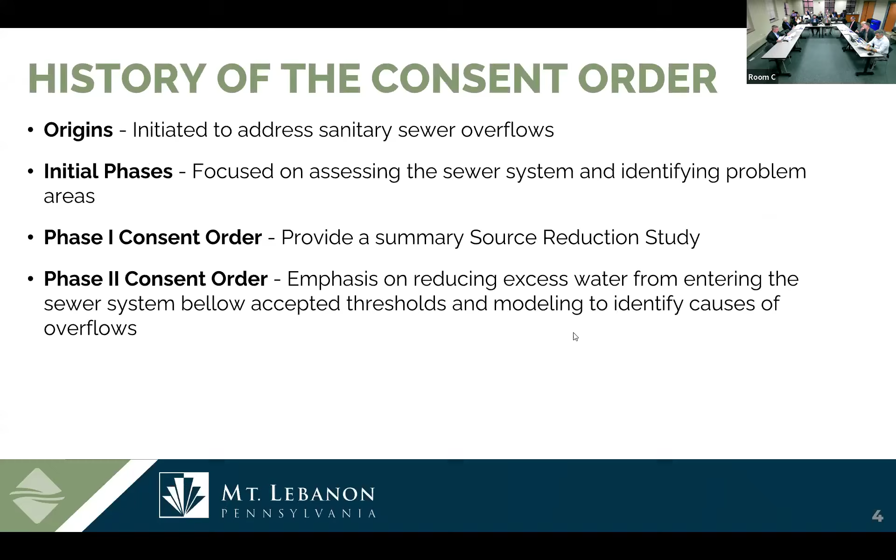So with the background, we're in the phase 2 order. We've been through a number of steps through the initial phases and feasibility study in phase 1. Within that phase 2 order, progressing through there, we're under construction right now. That was last year we talked about the large construction projects. Mount Lebanon really got out in front, doing some larger construction projects over the years prior to this year. That's all wrapping up now, and we're getting ready to move into the performance assessment, which is due by June 2026. So that's where we'll get into the meter discussion and monitoring in order to better understand how these projects actually fared.

By the end of next year, we'll complete a final report that'll be submitted to the county health department. Ultimately, there's a regional report that will include all the individual reports, as well as an overall summary, essentially setting up the next step for the phase 3 order that'll come after that.

Do you have a sense of when that is, or when that would be? So currently, the order we're under right now is signed with a completion date of 2029. It's expected this order will run until 2029. Then that's just a period of giving time, about 2 years worth of time in between when that final report is completed and working with DEP on what that next consent order is going to look like.

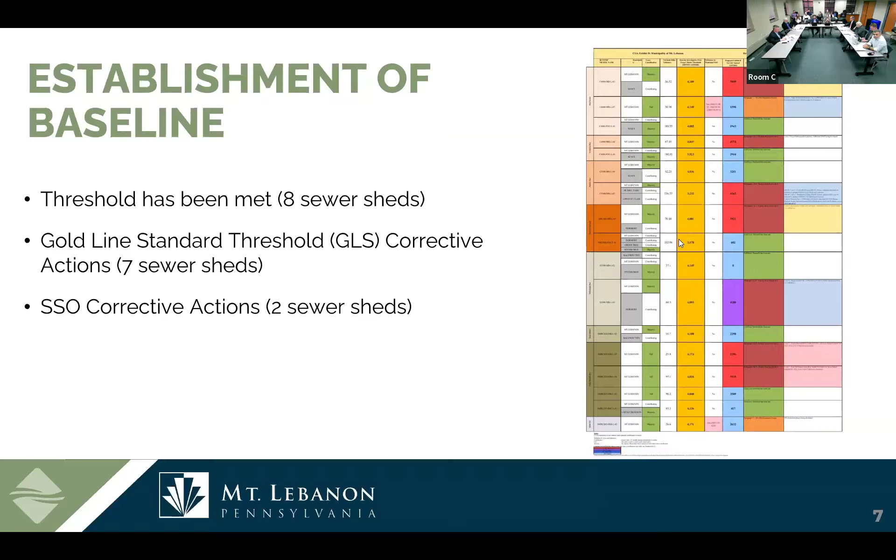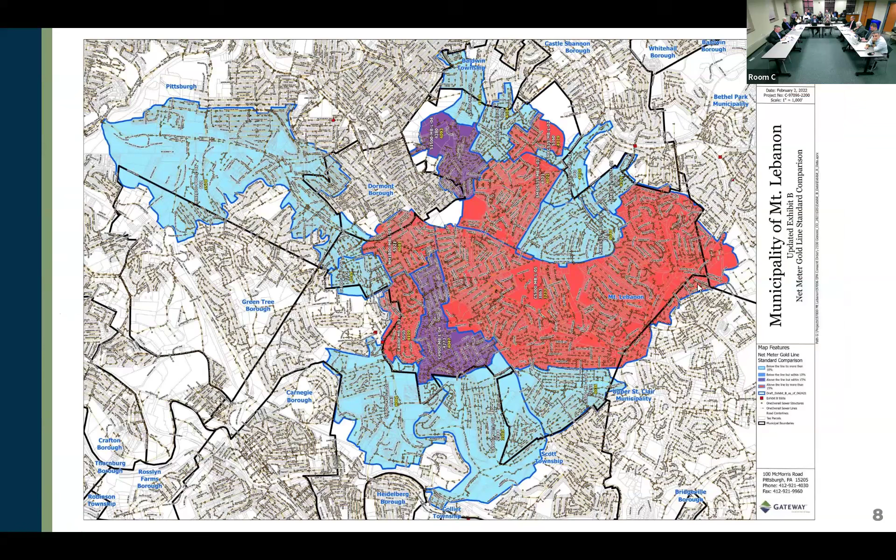Just an overview, looking at the overall municipality, you've got to kind of orient yourself - the north arrow's to the left on this. But it looks a lot worse with the big blotch of red. That is primarily Painter's Run, one of our bigger sewer sheds, which was over the Gold Line standard. It's where we focus the majority of our work - a lot of work's going on in that sewer shed currently.

So with that, there's approximately almost 100,000 lineal feet of CIPP, or cured in place pipe lining, that has been proposed as part of the work over the years. The required removal per the consent order is about 360 million gallons per year. Currently anticipated to remove 450, that's theoretically based on the calculations used to evaluate.

That's taking into account not just these larger projects that we're proposing, but also just the lining work that we're doing on a regular basis too. So it's the O&M work, operation and maintenance work done on a regular basis, as well as the larger GROW projects, which we've got a lot of grant funding for.

Even considering that Mount Lebanon is kind of top of the watershed, we've done more than our fair share of work there. Yeah, and it's an older system, a very dense system, so there's a lot of work to be done. But I think the last metrics were over 40% of the entire system has been lined, which, working with Rudy, that's one of the main goals - we want to rehabilitate all of it. It's 70 to 100 years old in a lot of cases.

And the consent order is just accelerating that. Exactly. We've even kind of changed the direction - the operation and maintenance, we're looking for specific defects maybe that we're repairing. Now it's a little bit more proactive in terms of where we're seeing I&I, or inflow into the system, and lining a lot of those lines.

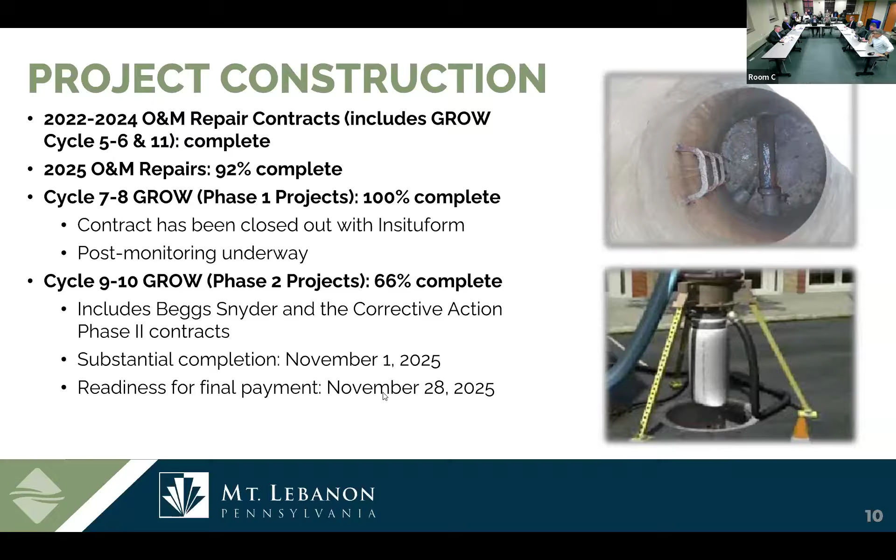We actually had some post monitoring completed. We have that data, we're starting to process some of it, so we'll have preliminary results of those projects. Then the cycle 9 and 10 GROW grants, that was Beggs Snyder and the overall larger corrective action projects - that's what was being performed this year, again with substantial completion anticipated in November and ready for final payment by end of November. We're still trending towards that as well.

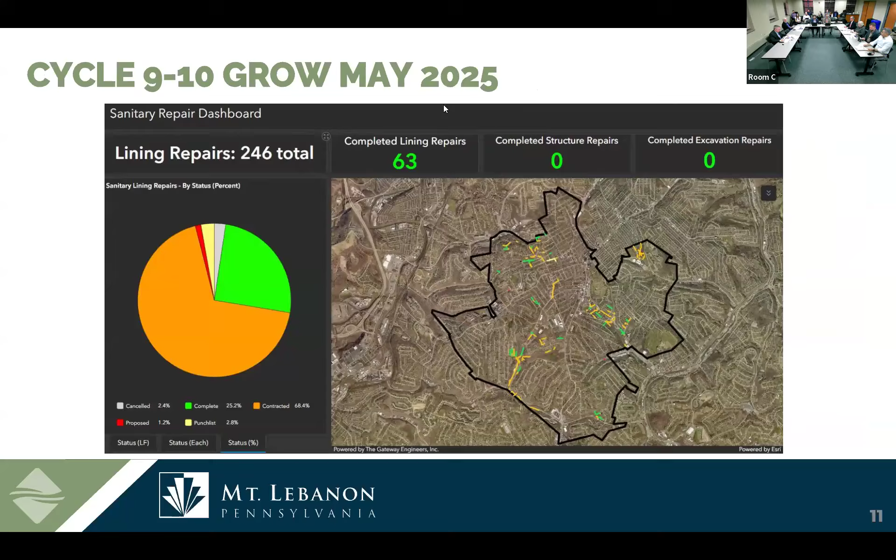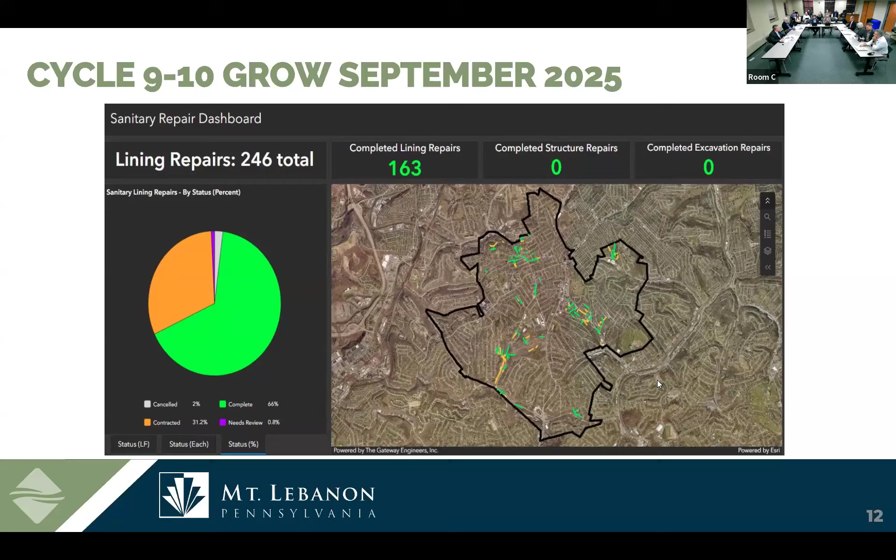This is just showing very quickly that initially back in May when we talked, we showed 63 of the liners were completed. Since then, 163 liners were completed, and that's just based on what we have in the database. I know the contractor was out there working today, I was talking to a resident on it today, and they even have a couple of crews out there, so they're working pretty quickly through it.

This was something Dan really wanted to show, a little bit of a metric showing what we're trying to achieve here. Ultimately, the required removal is about 361 million gallons. We are expected to remove about 451 million gallons if everything goes according to what was theoretical. As of right now, based on work actually completed, we're anticipating that we've already removed about 347 million gallons - again, just based on theoretically what should have been removed from those pipes being repaired. So we're already near our goal. The actual amount will be determined based on the metering performed, and the meters will continue to collect data into 2026.

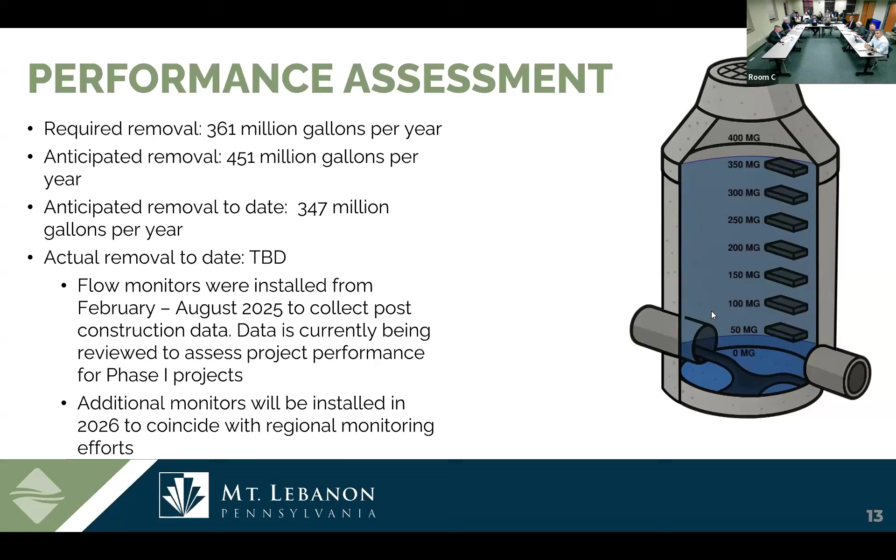Is that just like a random drawing, or - I mean, we made it, but I just thought it would be a good graphic, like what are we trying to get to, the top of the manhole? Yeah, essentially, just like the thermometer showing it filling. We did it - fundraising, fill the can.

So this is the spending portion we talked about. For 2026, this would be expected to be on the commission meeting agenda for October 28th, not tonight, two weeks from now.

For the metering, in order to do post-monitoring evaluation of all the sites and complete our reporting for the consent order, it was a total of about 14 locations. ALCOSAN has already taken care of 2 of those, and other municipalities, primarily downstream, are taking care of about 3 other meter locations. That leaves 9 meter locations.

For budgeting purposes, we're using a worst case scenario of 9 meter locations over 6 months worth of data. That's anticipated to cost about $1,500 to $2,000 a month. We're working with the 2 main metering contractors in town to see if we can get a bulk rate across all the metering we're doing. With that, it's anticipated to cost about $81,000 to $108,000.

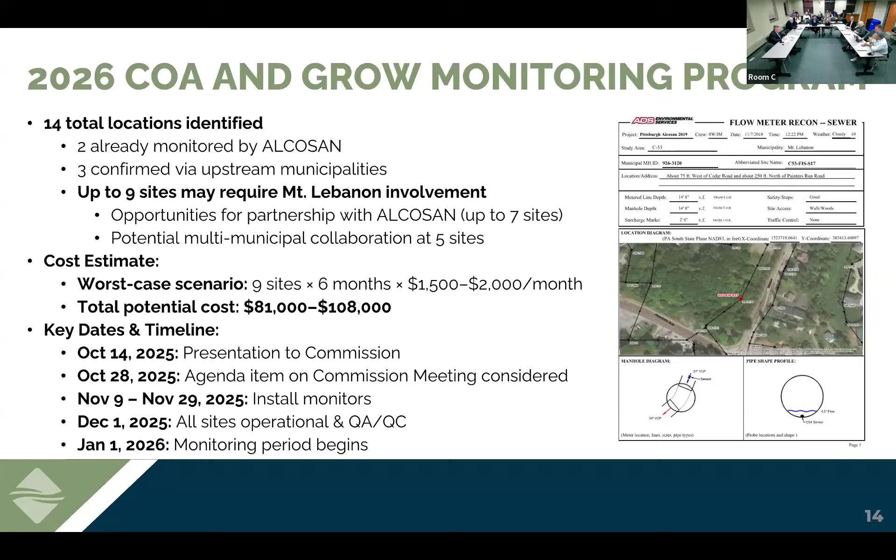Before we vote on this, can you give us a total amount we've received in Grow Grant monies? We can, and I think I have a quick slide on that — we'll give a quick overview.

And are these new meter locations, ones we haven't metered before? No, primarily they're all areas we've metered before, pre-metering before the work was done. So then it'll really be a comparison after the fact to show how much was actually removed by that work. Okay.

And the art is trying to determine, through all sorts of analyses, what the situation was at the time of the pre-metering, and compare that to the post-metering. Because rainfall changes — a lot of factors could make it look like it went up, but it might just be a rainier year in 2026.

It's helpful, because we had resident pushback on a lateral ordinance since we had really no data, although scientifically we know I&I is an issue. We didn't have data to prove that one way or another. Hopefully this gives us more of what we need, so if in the future we need to go down the route of a lateral ordinance, we have a lot more data to prove why it's necessary.

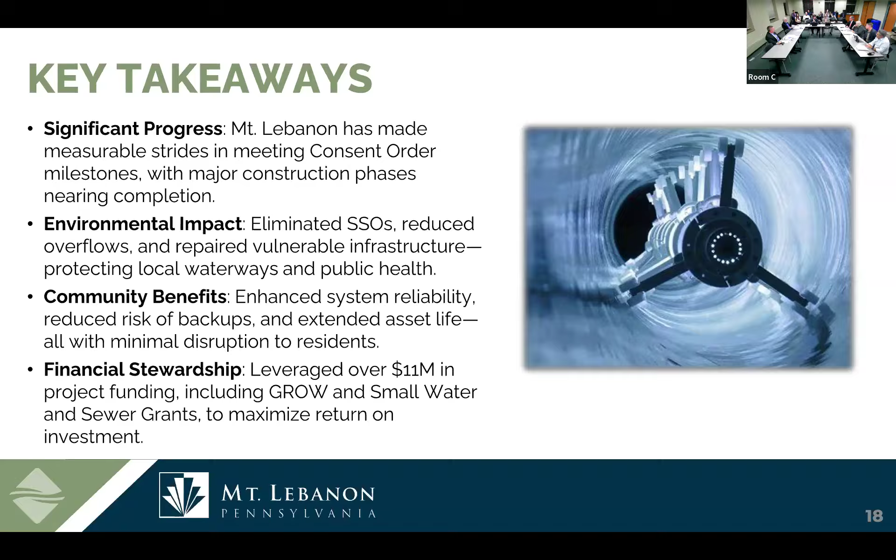We did a lot of work then when we had like 200-year storms within the span of a couple months. You're never necessarily going to design to that, but you've got to look for what those events show, and any of this work is helping with that. We had quite a few residents who had hundreds of thousands of dollars worth of damage to their homes because of overflows.

I just want to point out this is GROW Cycle 11. We had applied for this back in May or June. Just heard last week - I think Keith got the agreement last week or the week before. One thing that was a little bit different than most was we had actually received grant funding for this previously. It was the Cedar and Eisenhower repairs that we had received grant funding for back under GROW Cycle 6, for a grant amount of $87,000 for a total project cost of $490,000.

Because that was intertwined with some other work that had been done, we said why don't we apply for reimbursement on this. We did metering work, and that metering showed we had a high amount of removal. So instead of only a 17 to 18% match, the total project was closer to $1 million, like $950,000, and they awarded 60% of that instead of 17 to 18%. So that's $580,000 that we got for that grant, and that's all money previously spent - just getting reimbursement for that $580,000.

But we thought, as a wrap up to the project, it would be good to give the commission a summary of what all went into the project, and then as the commission leads into budget season, kind of where we're potentially going next with sidewalk installation based on prior direction from the commission, and if there's any considerations for changes or updates to the program, along with some lessons learned - because this was our first foray into the municipality installing sidewalks instead of them being installed by a developer or someone else. So this really was our first go with it. There were some very good lessons learned, and with that, I'll turn it over to the Gateway folks to kick things off, and I will chime in as needed.

So, thank you for having us here tonight. I think it's always good to look at projects, especially when you start doing them. Again, we're doing something new. We all have lessons learned, and Dawn's done a really good job of trying to follow this project through construction. There's a picture on the front, along Woodland, of the finished product - doesn't even look like we were here. You can see a different type of material here. This was one of the issues where we had different materials here versus what we wanted to put in the right of way. Those issues all sorted to ferret themselves out.

But as we jump into really how we got here, the commission decided to take on these sidewalks, and of course this was the first one that we went after.

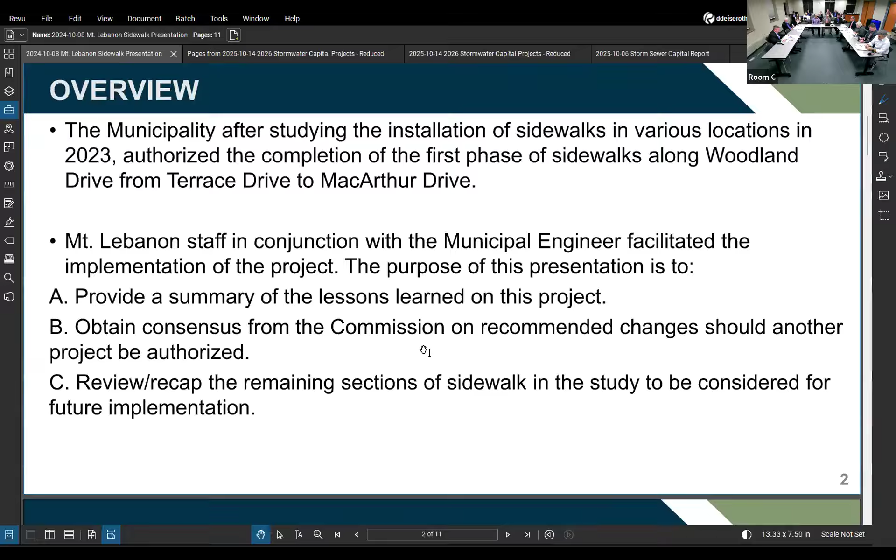Our intention here tonight is to give you a summary of the lessons learned, try to get some consensus from the commission on any changes we will look at, and then review and recap any of the remaining sections that need to be done.

Then we looked at the initial funding, and we were authorized in the budget to do the work. Then we had additional funding after we looked at the costs again, allocated from unassigned funds, because the initial funding from the budget in 2024 was only for half of the street. Upon further discussion, the commission wanted to do the whole section from Terrace all the way to MacArthur, so that was the additional allocation of funds.

So then we started the process with the residents. Initial letters went out, there was a neighborhood meeting, then additional letters were sent to residents. Specifically for the people needing driveway work outside the right-of-way of the road, those required specific agreements to be prepared. Ian and Phil spent a lot of time with residents trying to get to agreement on some of those properties.

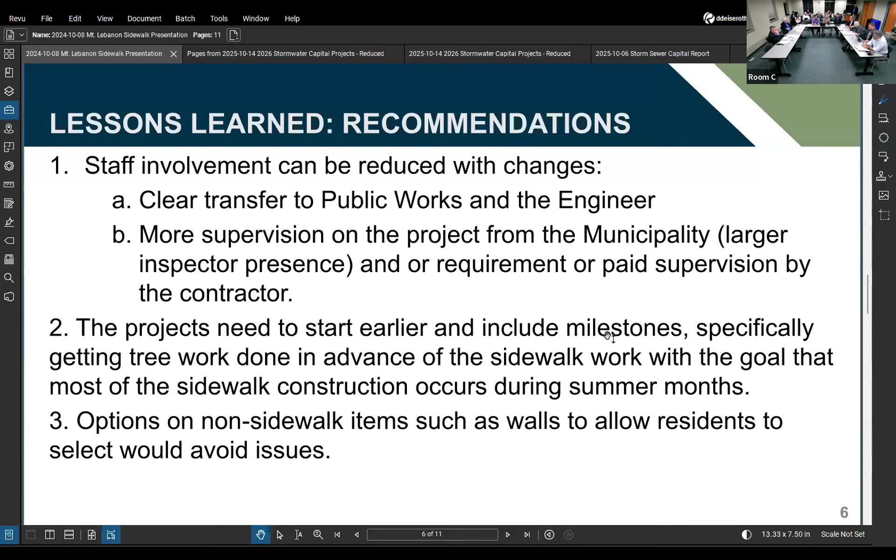And then the last one would be options for the non-sidewalk items, such as walls, to allow residents to select and avoid issues - we had cheek walls that were brushed concrete, and many residents reached out asking, can I do this wall? Instead of just putting them in as concrete, we list them as line items with a number, and it goes to them at that 10%. So they pay extra if it's a different type of wall - exposed aggregate's going to cost more than brushed concrete. Okay, that makes sense.

And then just some other miscellaneous construction issues - no spoils or materials should be stored on the street. We need to push more on no monolithic pours; the curbs and sidewalks are always supposed to be separate. That was an issue - they had to redo a couple ADA ramps. Then the plate colors need to be called out more clearly on the plans.

And we talked about restoration should be required. We're thinking doing it block by block - after they finish the sidewalk on one block, immediately move to restoration. These guys waited all the way until they were done before they started restoration, and we got a million calls because of it. Our street reconstruction contractor, as soon as he's done paving, he's restoring as he comes out of the road - it's done, he starts restoration after the curbs are done. It only makes sense - you have to be smart about it, and the first time they did it, everybody thinks they can pour concrete.

So on these items - the construction drawings, you guys are reviewing all the construction drawings? We need to, again, we had it on the plans, but they just weren't paying attention to the plans. And the monolithic pours were not allowed, so they didn't notify us to even inspect their forms before they poured - they just went ahead and poured it all together, which isn't allowed, and we have to tell them to take it out. So that takes time - it's a fight.

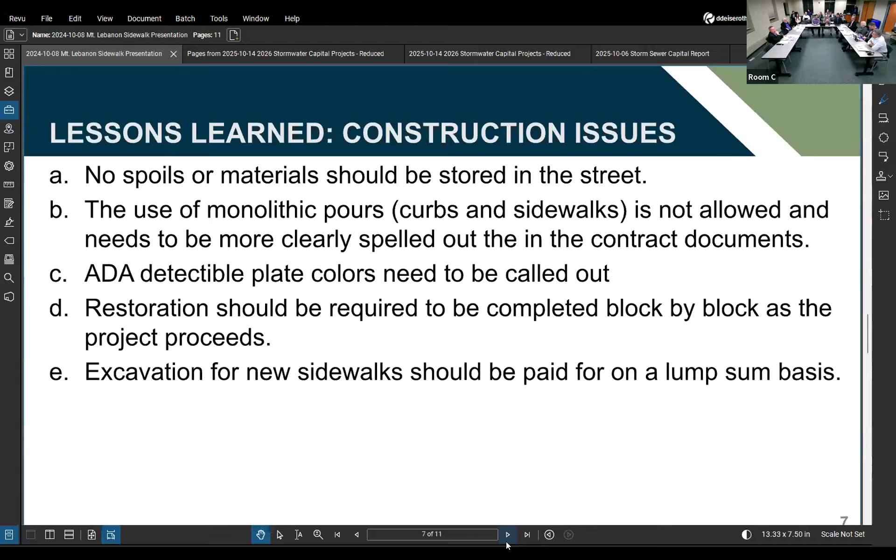So I think the next slide can be the last one. At the January 28th discussion session, almost 10 months ago, the commission talked about where we wanted to go next after Woodland. And the commission direction at that meeting was for Greenhurst and Lakemont to be first.

Greenhurst, because of the connectivity between Bower Hill Road, St. Clair Hospital, down to where there are sidewalks going down the hill that the high school kids paint their graduating year on, which leads down to Main Park and the high school. But between the section between Lakemont coming off of Bower Hill and about halfway down Greenhurst, there is no sidewalk. So that was the commission direction for the next one to tackle, and then connecting that through the S curves of Lakemont, which is the cut-through for St. Clair Hospital traffic during shift change to get southbound to the communities south of us.

I used to live in that neighborhood, so I know there's a lot of cut-through traffic there. And that does also connect over to Hoover Elementary as well.

Just to get back to lessons learned about moving the timeline up. On the Woodland project, we didn't bid it until March, and bids were received in April, with the idea to start when school let out in June. But if the commission allocates funding for Greenhurst next year, our recommendation would be to get the bids out sooner, like the beginning of the year, and authorize the contractor to start the tree work first, potentially in April and May while school's still in session. Then once school's out in early June, if any trees need removal they'd already be done, so we can do that ancillary work first and be ready to start on the sidewalk when school is out.

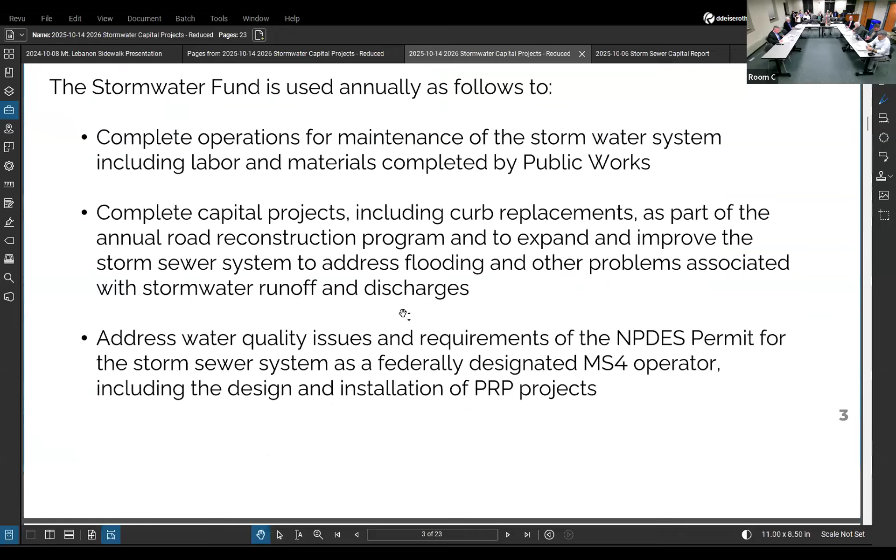I'm gonna jump right into, you guys all know what the fund is. We use it for street reconstruction and then to address capital projects. Street reconstruction is mostly curbs and any stormwater work.

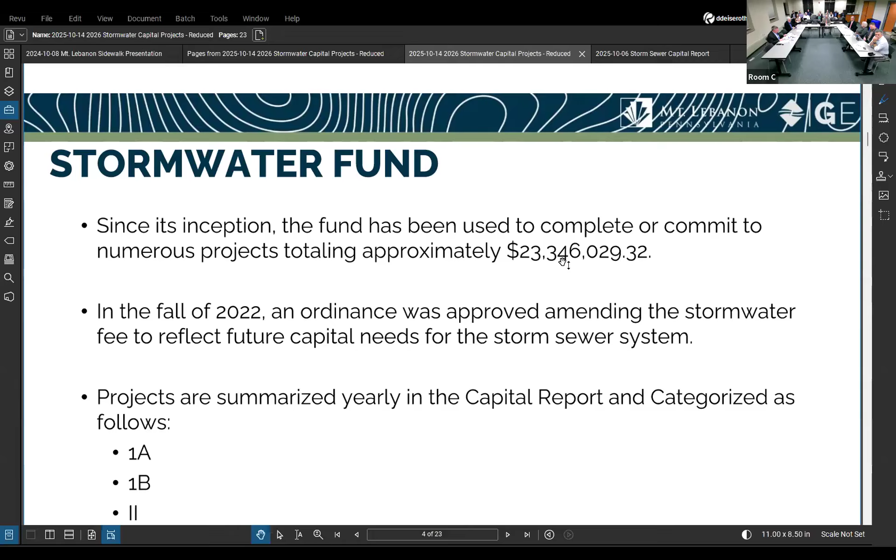Since its inception, the fund has been used. We've really done about $16 million worth of work. In the capital list, there's approximately another $6 million left to be done on that list that's still out there, including major capital projects and ice spots that are a big part of the list.

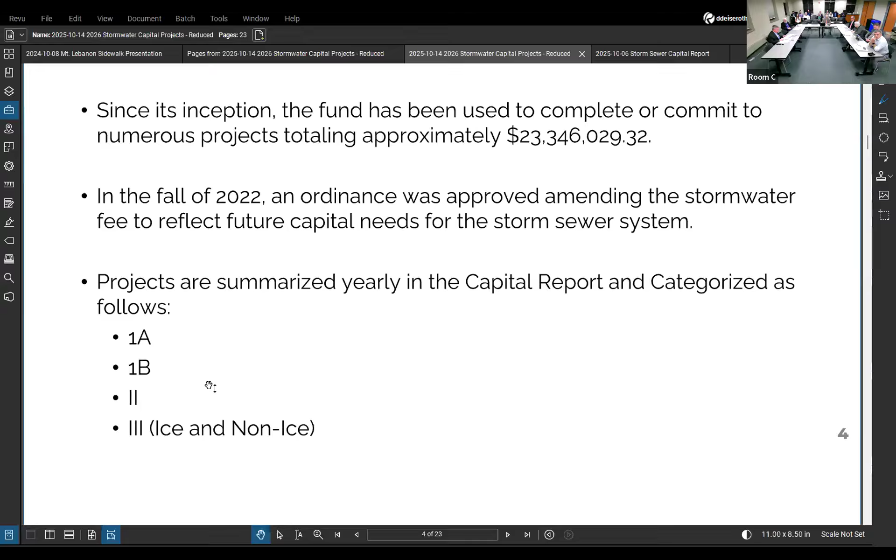So we categorize things in terms of 1A, 1B, 2, and then 3 for ice and non-ice areas. 1A is like flooding of residents and damage to their structures. 1B is property damage. 2 is just improvements that would help the municipality in terms of maintenance by Public Works. And then 3 is just the ice spot list. It's maintenance also, but it affects residents in different ways.

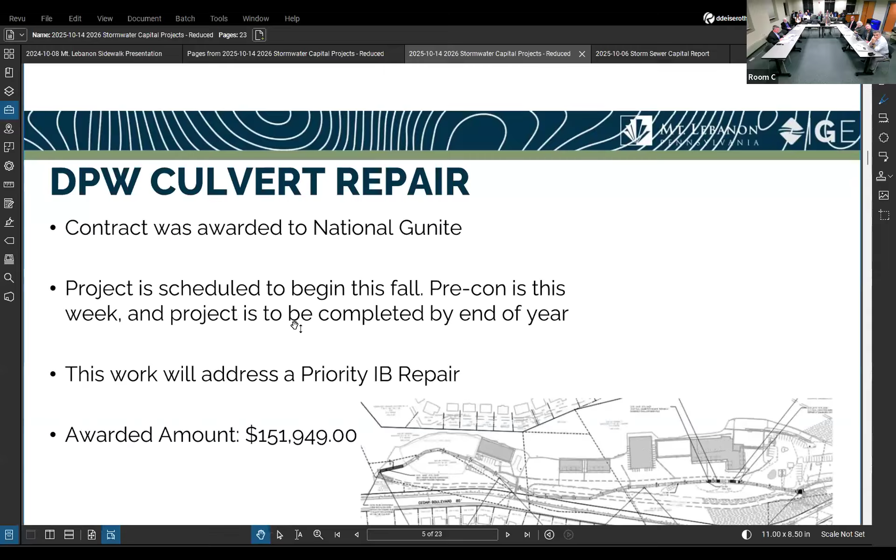So this year, we're still building on the stormwater fund. The commission authorized the project - we talked to you guys about this already - further work to the culvert down at Public Works. It's something we need to do and stay on top of, and that'll be taken care of.

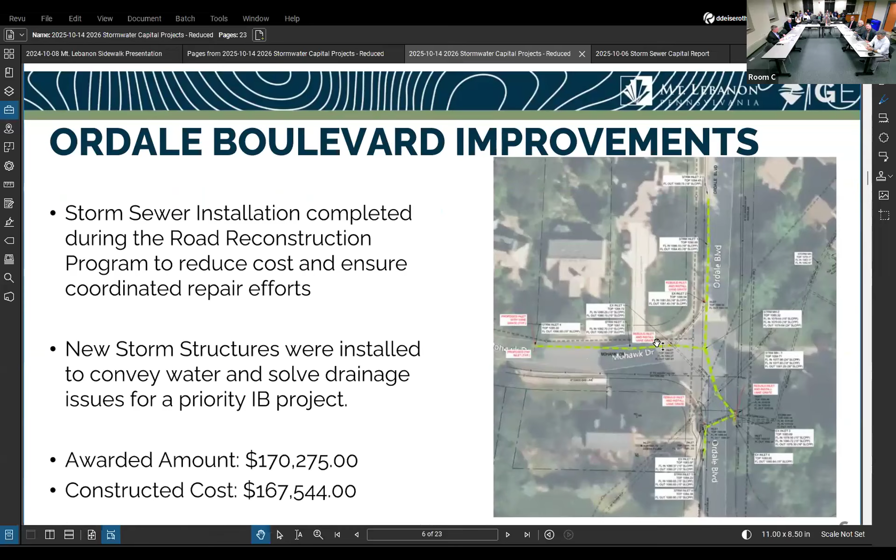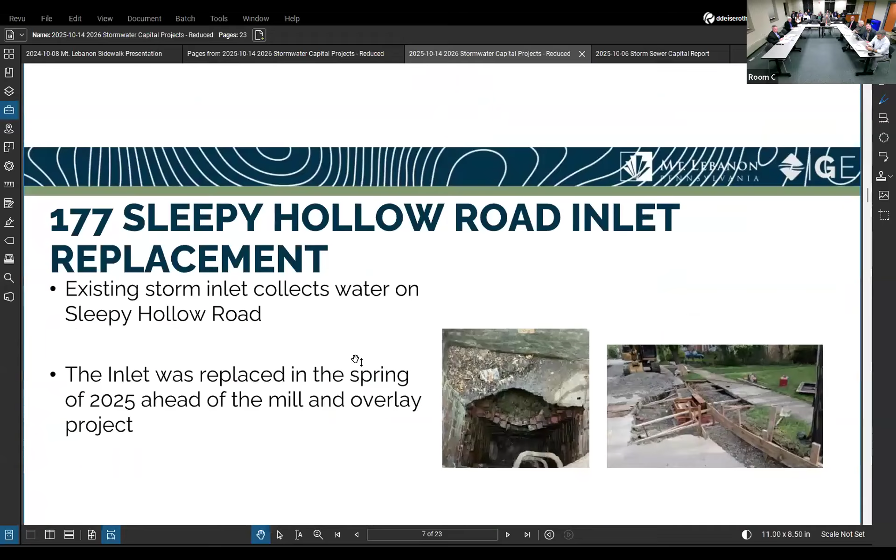We also talked to the commission about this work that's already been done. That was a big stormwater project associated with street reconstruction. This has been a nagging problem for years. It's now complete at the cost of about $167,000 as built.

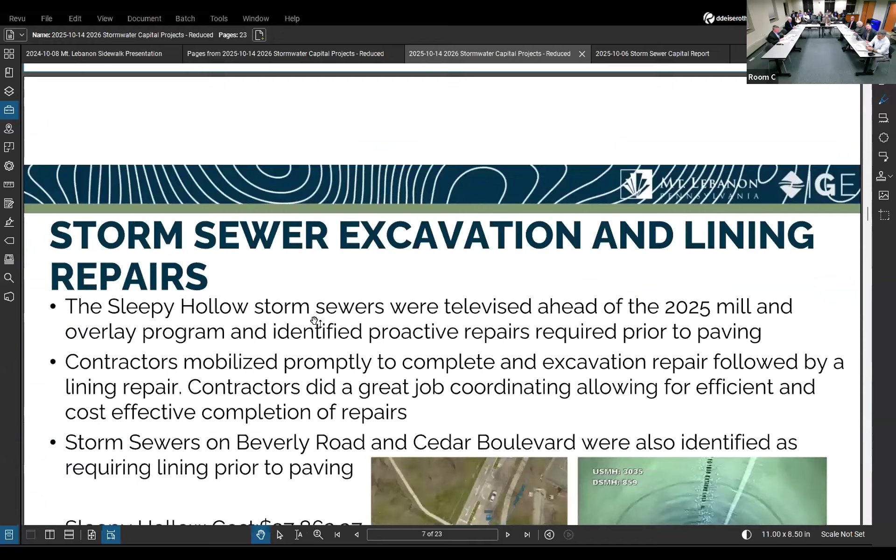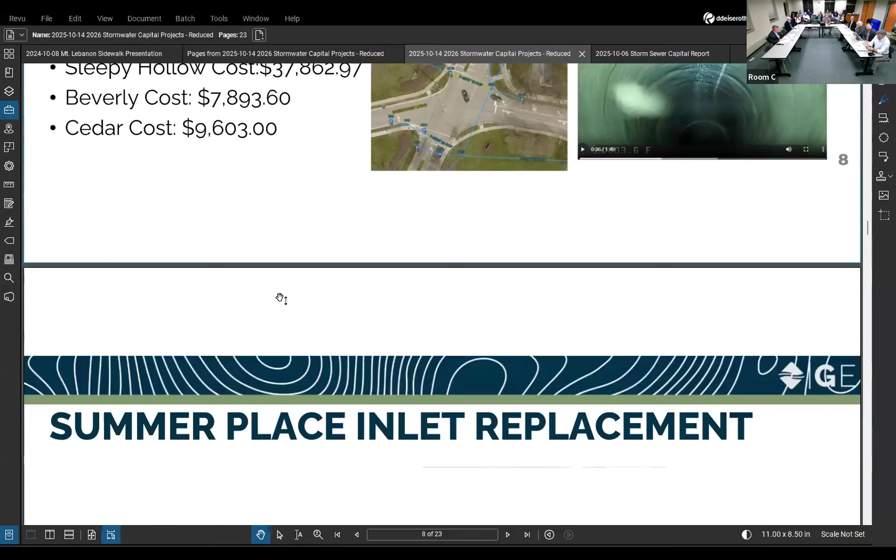And then Sleepy Hollow, we had just some minor stuff related to things like an inlet repair, cost $5,000. Then we did storm sewer excavation and lining repairs in a number of different locations. We spent a total of about $50,000 on that work. We did an inlet over on Summer Place. So a lot of smaller items there.

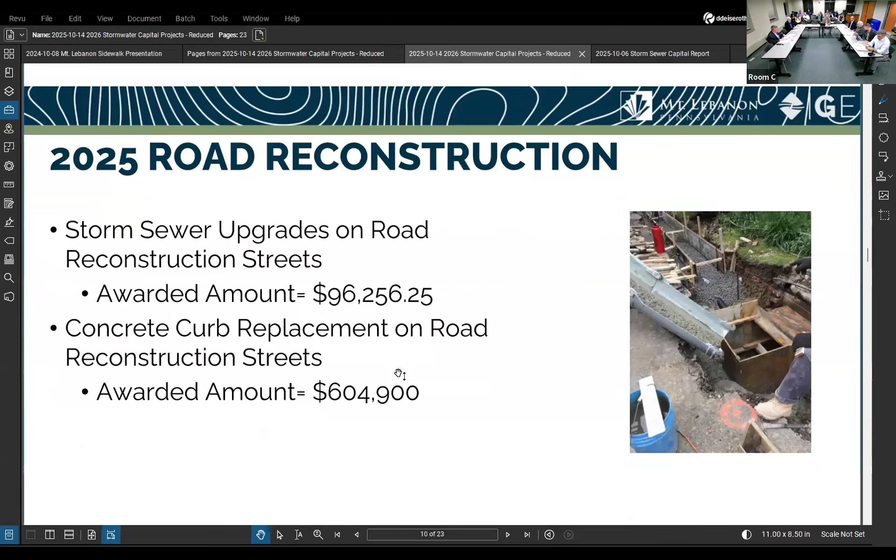On the street reconstruction, we spent, for storm sewer work, about $100,000. And then we used the money for curbs also, which was $600,000 this year. So a lot of work still being done with the fund as we build it up. And we proved to the commission that it wasn't sufficient to do the work that we needed to do.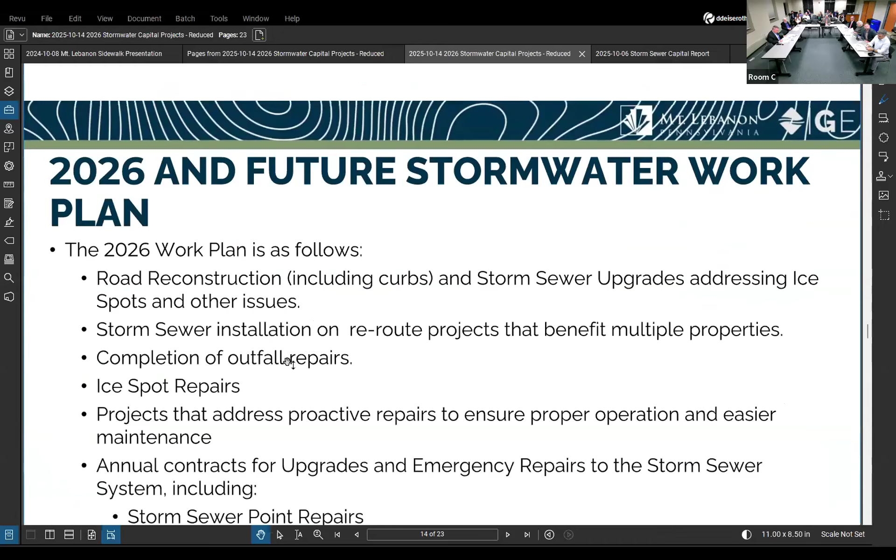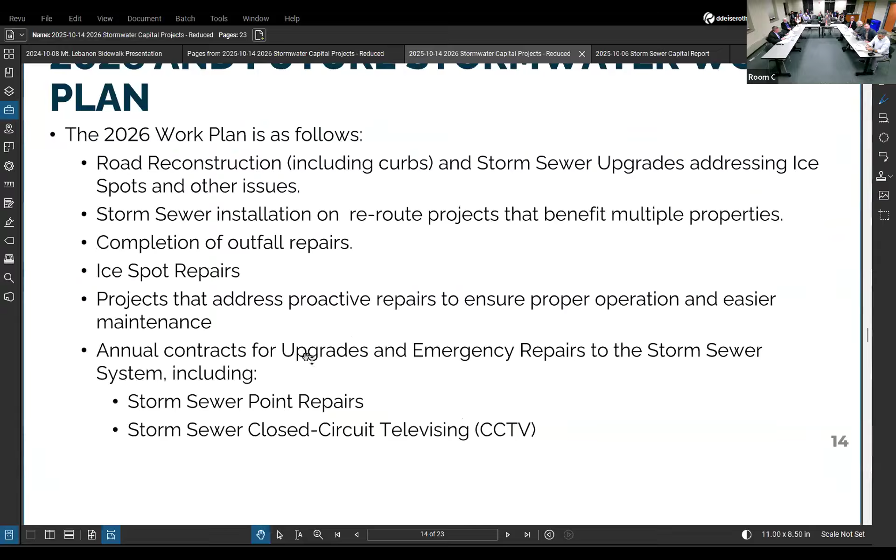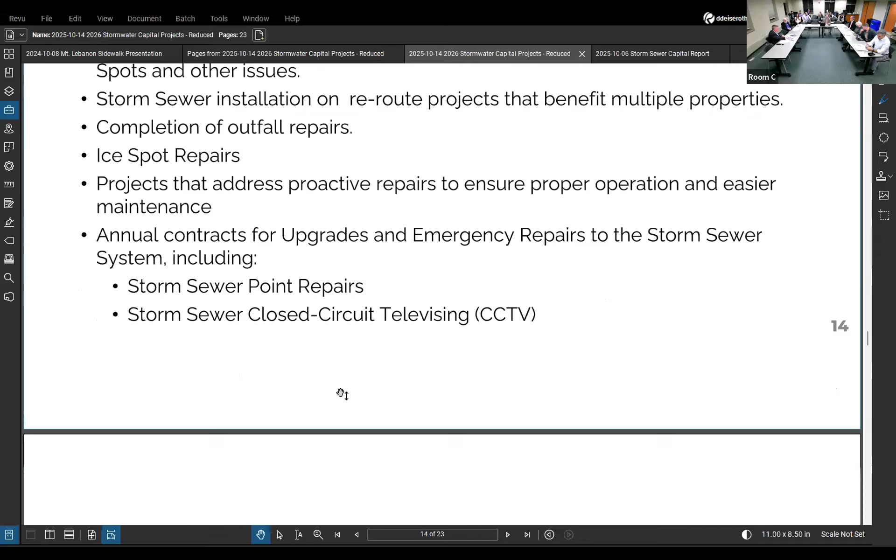So for 26 projects and beyond, the work plan again is street reconstruction, storm sewer installation on reroute projects that are going to benefit multiple properties, completion of outfall repairs - this is just sort of our priority list. And then we just budget money for annual work for storm sewer repairs. We know there's things that are gonna come out there that we don't know about. And we've continued, like the sanitary sewer, to be proactive in televising to make sure things don't surprise us. We don't like surprises, we'd rather plan for those.

Some of the bigger projects still on the list: the Iroquois culvert, we talked about this a couple of years ago. This is a big storm sewer that would need rerouted into the street, would need easements and other things. This has been on the list, we continue to keep it there, continue to monitor it. It's not the highest of priorities for us, but it's a large project.

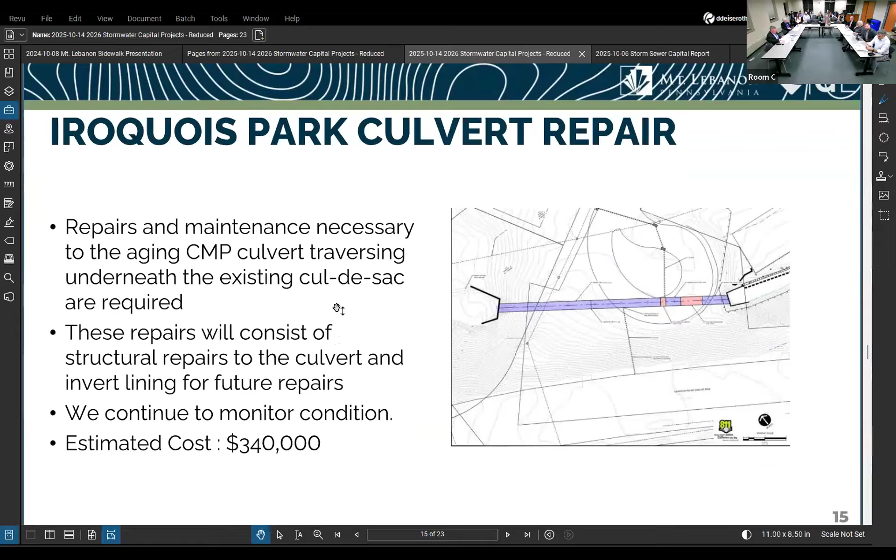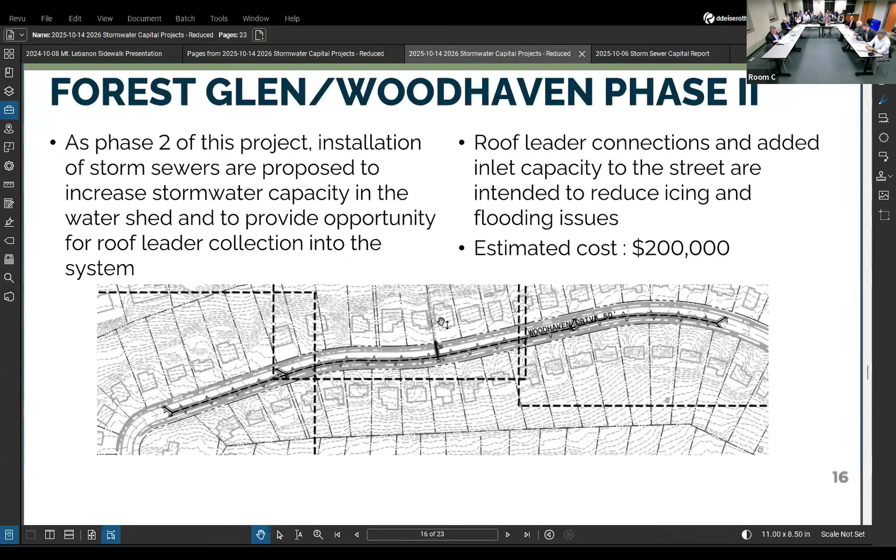Forest Glen and Woodhaven, we still have that on there for phase 2. Knock on wood, the first phase has worked well. But this is out there - again, this isn't the highest of priorities right now.

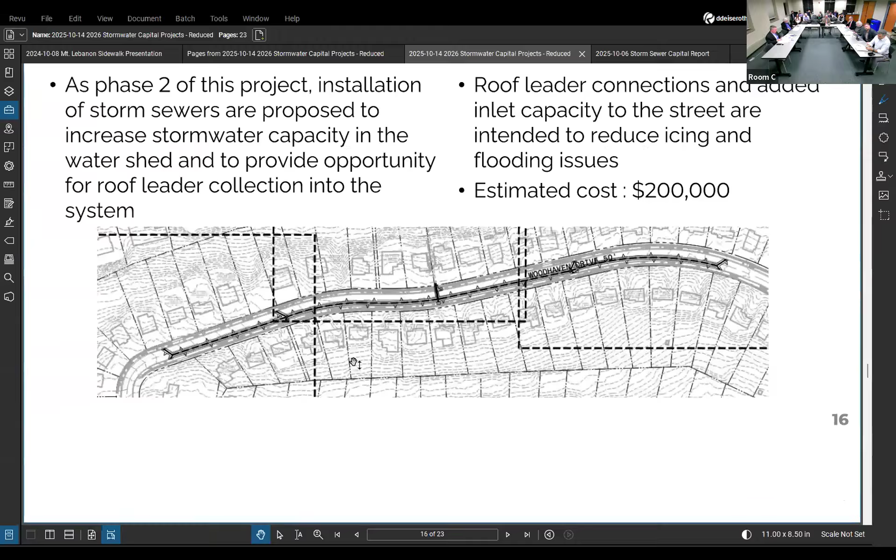The one I mentioned before - sorry, this is the one that I think is priority. Iroquois is a priority because this is a municipal street. This is an old culvert that passes underneath the street. If we lose the culvert or it needs repair, we're gonna lose the street. So this is one we wanna be proactive about. And we've talked to Rudy about maybe doing a full replacement of this with just a plastic pipe, modern material that will be much cheaper to do if we can get it to happen.

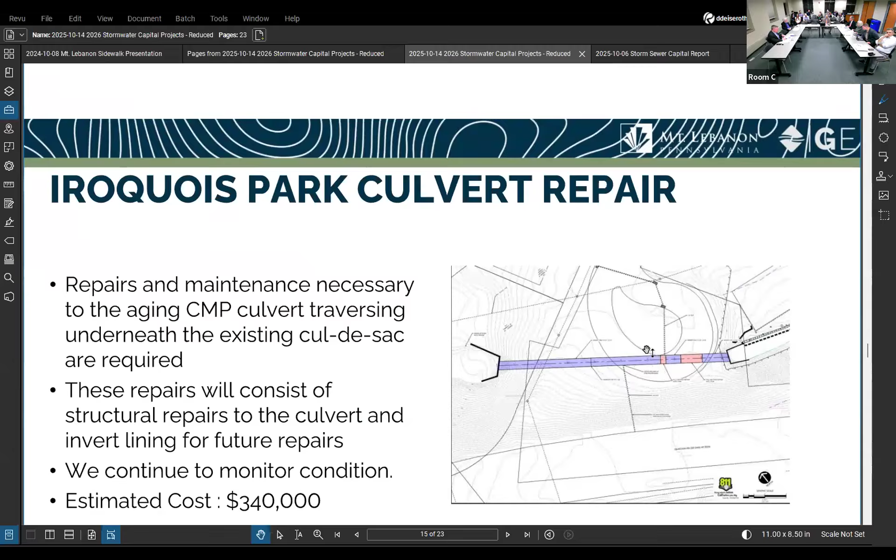So this is programmed for next year. Sorry about coming back there.

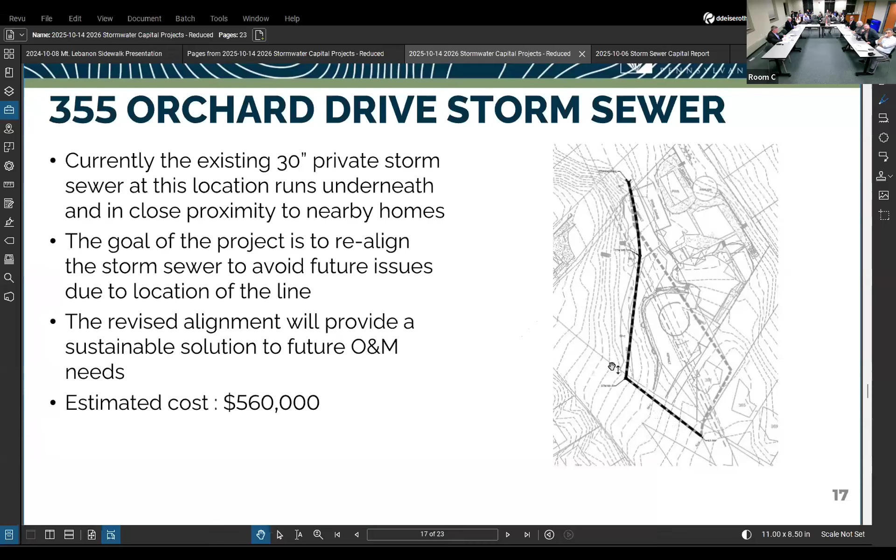355 Orchard, as I said, this one is not as high a priority, but we're monitoring it in terms of when we need to do it. There's no municipal systems involved here. It's a private pipe on private property that the residents have approached us about rerouting. That's going to be a decision if the commission wants to move forward with that in the future. It's in the CIP.

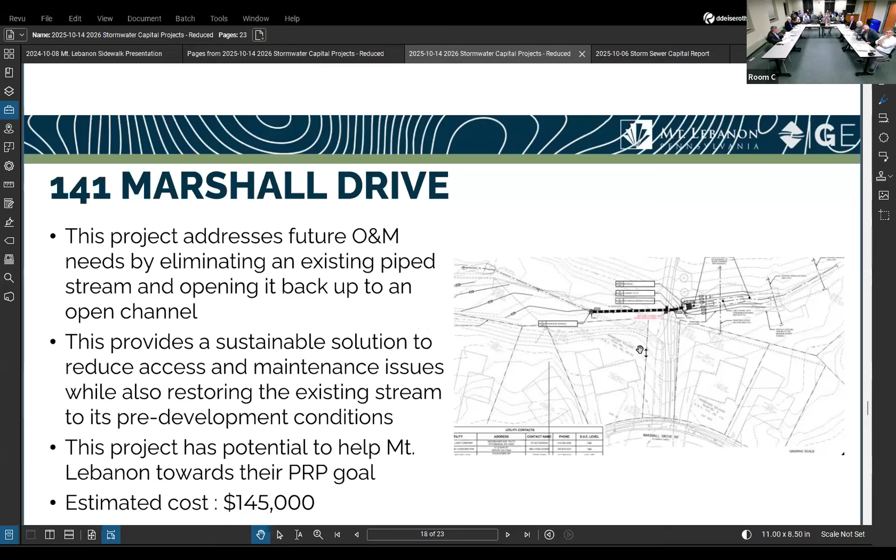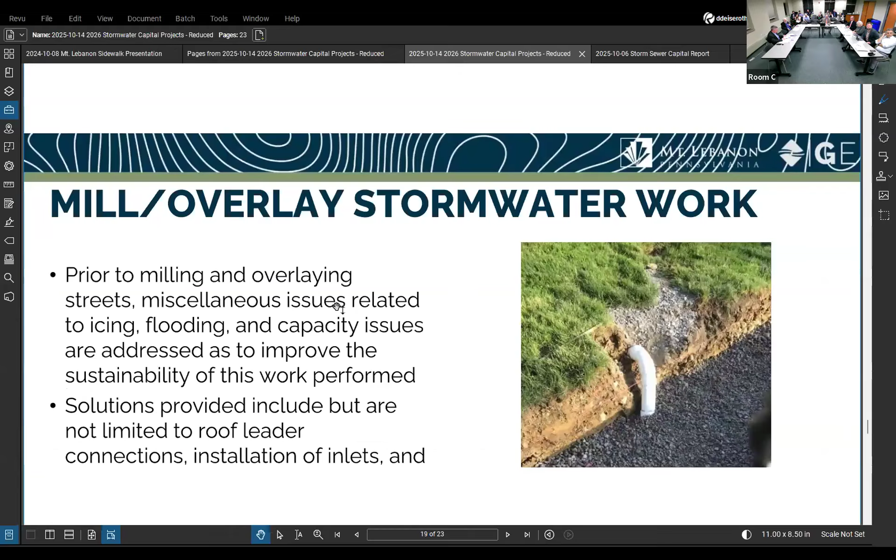And then in the mill and overlay program, again, we look at solutions to fixing inlets, ice spots, and other things that we can do in that program, and other O&M activities we have involved, emergencies as we talked about. So this was the summary of the future projects.